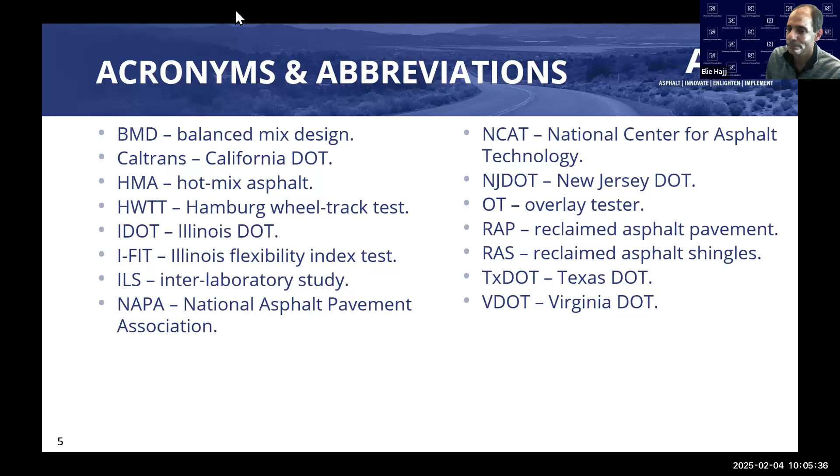Obviously, there will be some acronyms throughout the presentations, and we have them here. The main ones are listed over here for your reference. Sometimes it may be hard to keep up with the acronyms, so I'll stop just for a few seconds here to give you a chance to go through them. Thank you. If we can move on to the next one.

And then the expected outcomes for today's webinar. So we're going to be talking about the implementation plan for balanced mix design. So it is critical to recognize how important it is to adopt and develop an implementation plan, as well as identifying the key tasks that need to be completed prior to creating that initial implementation plan.

Hopefully, by the end of this presentation, you'll be able to understand how your available resources, whether you belong to agencies or contractors, can influence the scope of the implementation plan. Also identify how key stakeholders can assist in the development of the implementation plan. And finally, hopefully you'll get to learn about some of the effective practices from the lead states related to the BMD implementation plan. With that, I will pass it on to Tim Aschenbrener to get us going on the presentation.

Well, thank you, Elie. I'm going to start off and go over a little bit of the background. Derek is going to follow up and go over some actions prior to creating a plan. Then I'll pick up on implementation planning and provide examples from 3 state DOTs. And then Derek will wrap up with effective practices and lessons learned.

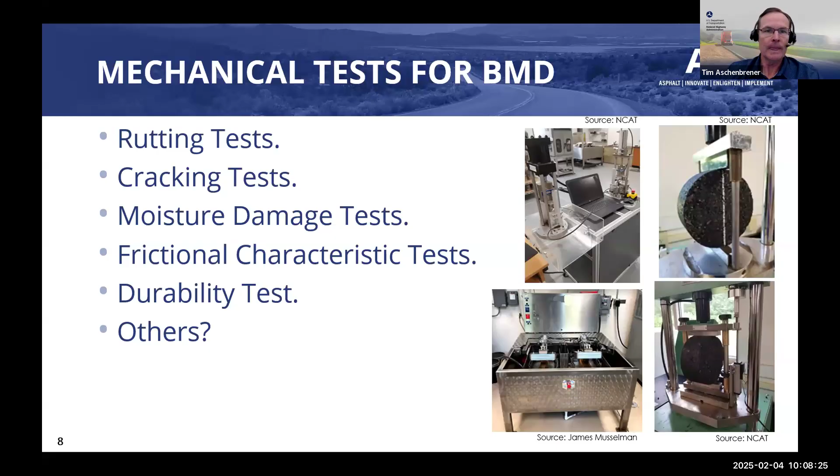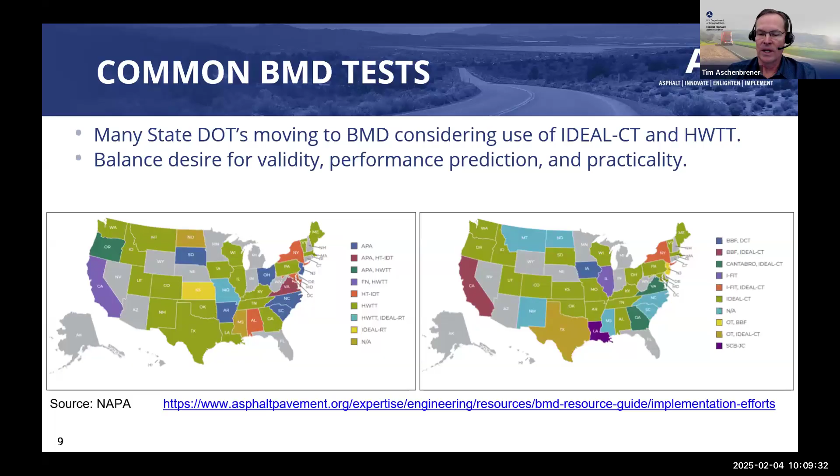But the most common rutting test, the map there on the left, seems to be at this time the Hamburg wheel track test. There's about 22 states that are leaning in that direction. Not only does it do rutting, but it also gives an indication of moisture susceptibility as well. And then the map on the right shows the direction states are leaning towards in terms of cracking test. Right now it seems the IDEAL-CT is the most popular. There's about 23 states looking at the IDEAL-CT.

Now you'll see there are some approaches here that states have selected. And the one comment I would make there is you don't just want to get locked into one approach. You don't want to find your favorite parking lot and park there and stay there forever. You certainly want to advance, but of course advancing relies on confidence in the test. And to get that confidence that the test results match your field performance really relies on validation. And I bring that up because validation will be the topic of our next webinar series next month.

And as we go through this information, we've gathered information from a variety of sources. Most notably, we looked at case studies from seven lead states back in 2020. We virtually visited these seven states. We looked at the information and specs in advance, and then we spent two to four days with each state to understand all the details of where they were at. Now, that was a little while ago, but we have kept things current. We've stayed in touch with these states to make sure we have the latest information.

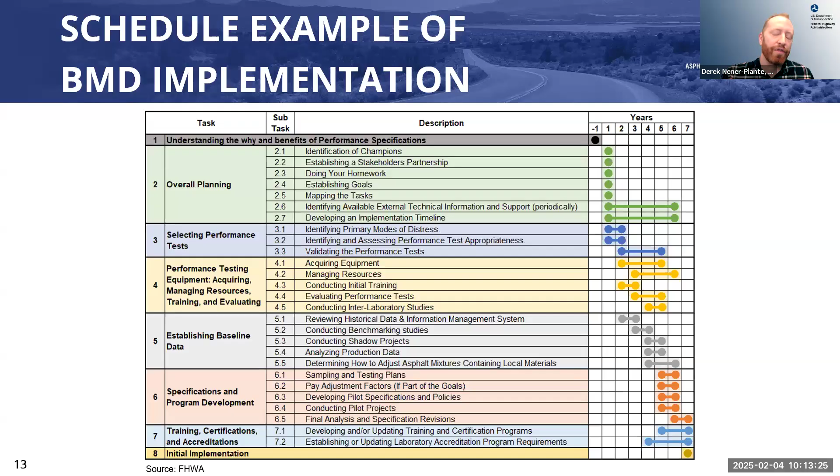So for this particular webinar, we're talking about what is typically put in task 2, overall planning. Makes sense, right? So what I want to cover is some of the things before you can even get to the plan. What are some of those things you need to consider even before you get there?

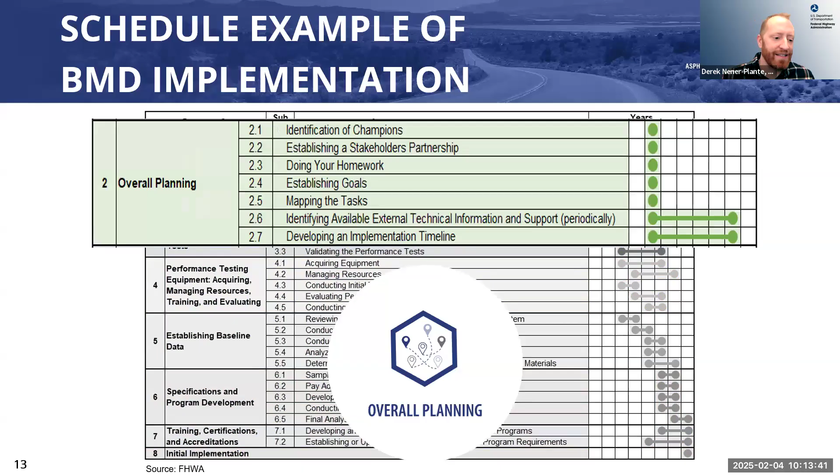And so a big one that can't be underestimated is understanding, why are you changing? Why are you looking at balanced mix design in the first place? Why are you going to expend resources? And this is great advice that's been taught time and time again, that change can be painful, change requires effort, and you need to know why if you really want it to succeed. So why change? Why do balanced mix design?

So I think the obvious thing that we often hear is that many believe, number one, mixes behave differently, that within your state, within your agency, within your area, you have certain classifications of mixture. And whatever they are, class 1, class A, they all behave a little bit differently, right? Even though the specification says they're equivalent products.

Many also acknowledge that the current design procedures may not optimize performance. In general, the pendulum shifted: we went away from previous mix design ideologies, we went to Superpave. We got rid of rutting, we had cracking and more cracking, and volumetrics alone is not optimizing our mixtures. So number one, improving performance has got to be in there as a why.

I'll give a couple examples of seeing the evidence of improved performance with balanced mix design and the potential for the future. Because as those working in the pavement world, we all know that if all of a sudden, from this year to next year, every treatment we do gets one more year, it doesn't sound like a lot, but it makes massive impacts to our transportation network. Even though that doesn't sound like a huge impact, it is. I'll show some evidence of that in a moment.

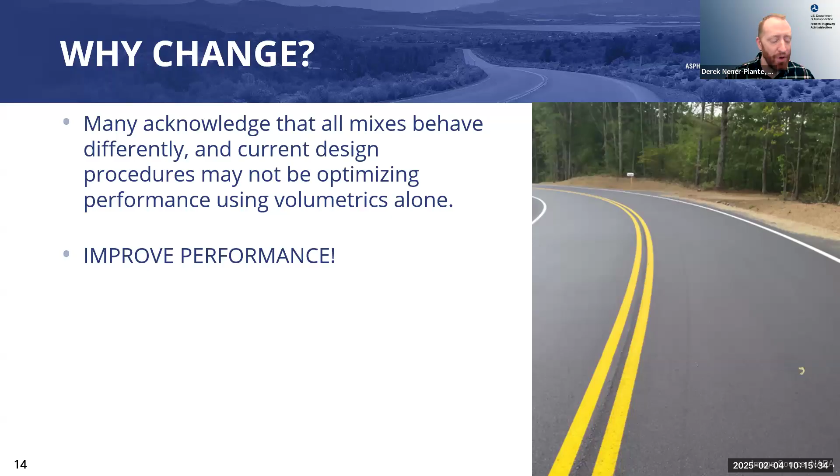RAP was certainly around, but not pushed to where we use it now, with increased percentages or the use of fractionation. Modified binders, again, not to the degree that we have today with a number of modifiers, the highly modified materials, etc. Those binders weren't around when Superpave was first developed. Fibers, additives, warm mix, the list goes on. There's a lot of new technologies that were not necessarily incorporated into our volumetric or Superpave analysis. So they're not necessarily handled well in that system, and we need something that can account for their impact on performance of the mixture.

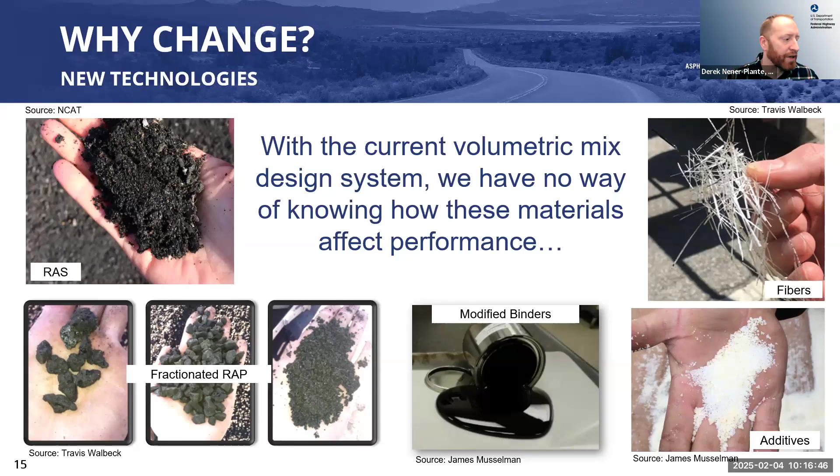So what about all the other benefits, right? Certainly we want better performance. We want ways to incentivize better performing asphalt mixtures. Well, what else? A big one for many states is optimized use of recycled materials. We know that recycled materials can lead to more economic mixes. There can be savings there, as it uses asphalt that's already in those recycled materials, or aggregate, et cetera, to help keep costs down, and also reduce impacts in other places like emissions.

But the idea being that a lot believe, and a lot of the work has shown, that Superpave may be okay at a certain RAP content or recycled material usage, but beyond that, it starts to struggle. And it's in that struggling area that maybe balanced mix design can come in. So allowing more recycled material usage is one potential benefit that many agencies and contractors as well are looking at.

That goes into also local materials, utilization of more local materials. We know that resources are finite in a lot of places, be it aggregate, binder, etc. So if we can promote the use of local resources, maybe aggregate sources that are closer to the project, closer to your area, that may not only help on the economic side of things, but also in impact to the environment.

All those things kind of put in together. It can also perhaps handle innovative materials. I know agencies a lot of times are approached by a new product, a new additive, a new way to put in asphalt mixtures, whatever it is. Today we talk a lot about recycling agents, warm mix asphalt, new binders, bio binders, etc., modifiers.

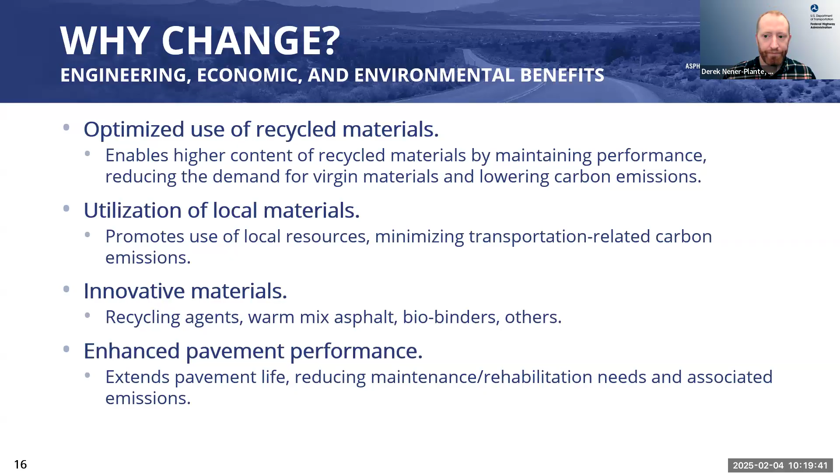So these are their mixtures that they use on some of their highest traffic locations, or in other cases, high RAP mixtures. And the backbone of those specifications are mechanical mixture performance tests, balanced mix design. Some of their specifications even go to the point of not necessarily specifying binder grade, and just saying meet these 3 tests for durability, for rutting resistance, etc. And they say in these cases, in some of the roadways with the highest traffic in the nation, they've seen significant life extension. There's a big difference on a major expressway near New York City between getting 5 years and getting 10 years.

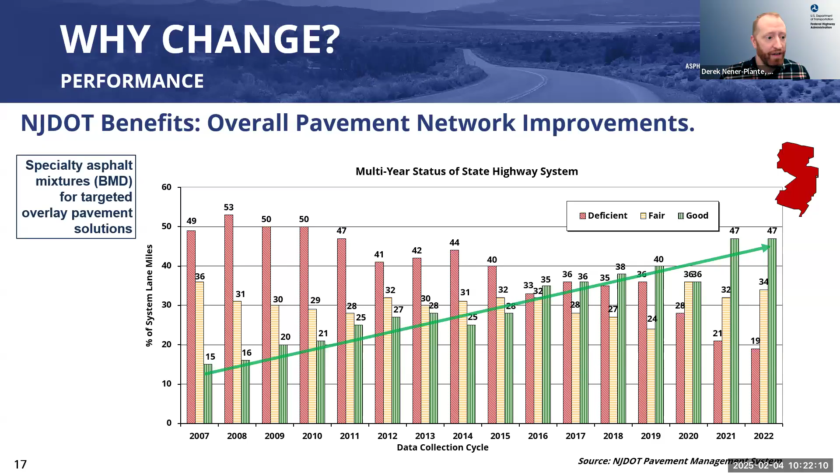Another example on why change is an excellent one from the National Center for Asphalt Technology, NCAT, and their test track, where they do traffic loading on sections over the course of 2 to 3 years. This is an example from Texas mixes using and not using balanced mix design. There's a lot of research that goes into this, but essentially they have similar mixtures: one that was volumetric and 2 that were designed with balanced mix design. These still had to meet volumetric requirements, but they adjusted the mix a little beyond what their typical specification would allow, and got to the sweet zone of an overlay test and a Hamburg wheel tracker.

The other 2 BMD mixes: one has been out there for the same amount of time. It has less than half of the cracking that the other section has, and has kind of plateaued a little bit. Another one is in a newer cycle, the newer N6. But N6 has no cracking after 9 or 10 million ESALs so far.

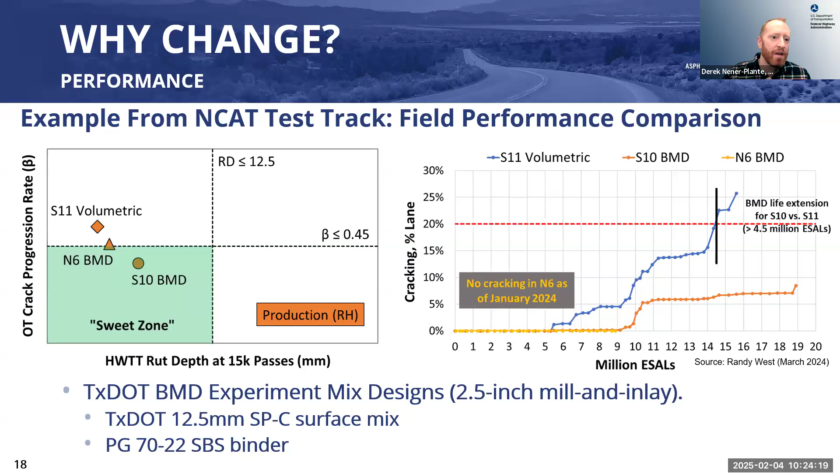So if you extend this out, NCAT has done analysis, and I implore you to look at those resources to see that specific analysis. But this has huge life cycle benefits from the life extension that you're getting. And this is the proof in the pudding. This is showing that by taking a purely volumetric design and designing more with balanced mix design in mind, you can make significant performance improvements. And imagine that throughout your system.

So we highlight the why here and try to hit on it hard because we have had experience in certain areas that maybe haven't coalesced what their why is. Understood, improved performance is probably the same for everybody, but there are very specific ways that we've talked to different agencies, different areas, and their why is slightly different.

And in order to get to a good plan to move forward to implementation, it's important to know your why. Why are you going to do this? How are you going to justify this to people that ask why you are doing this? So that's a really important thing that you have to do in order to even get to the planning that Tim is going to talk about.

Other important things to consider before you start crafting a plan is identifying your resources. And a big thing, I see we had a lot of people signed in from agencies, is the identification of champions, on the state DOT and the industry side. Have somebody that's going to fight for balanced mix design implementation within the area that they work. It's important to have these champions, and we could throw this slide up for nearly anything, not just balanced mix design.

But if you have something where there's no one really as a point person, it can lose some of that drive, someone who's going to continue to push it forward. So it's important to have that champion, not only at the agency or state DOT, but also somebody within industry who's going to help corral things on that end and get industry involved, as we'll talk about with creating the plan.

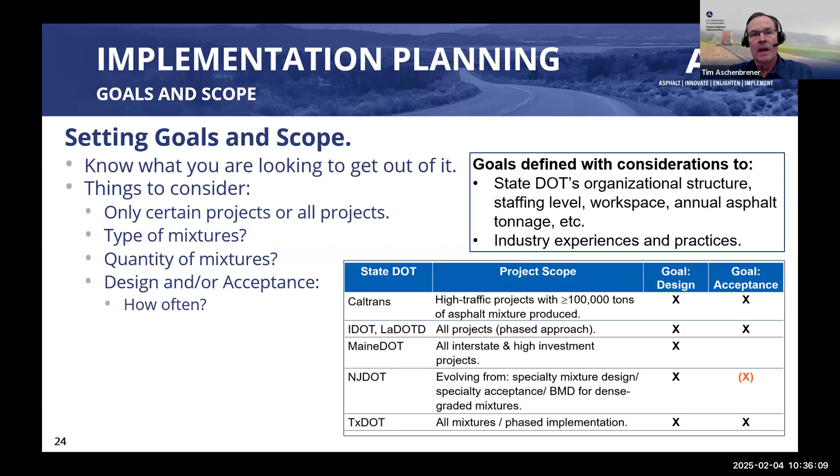The other thing I want to point out in terms of the goals and scope that could make things complex is how the mechanical mixture performance tests, how those balanced mix design performance tests relate to mix design and acceptance. Now, in mix design, more often than not, the contractor has the responsibility of developing that mix design, oftentimes in the lab, but not always. And then the agency has to approve the job mix formula.

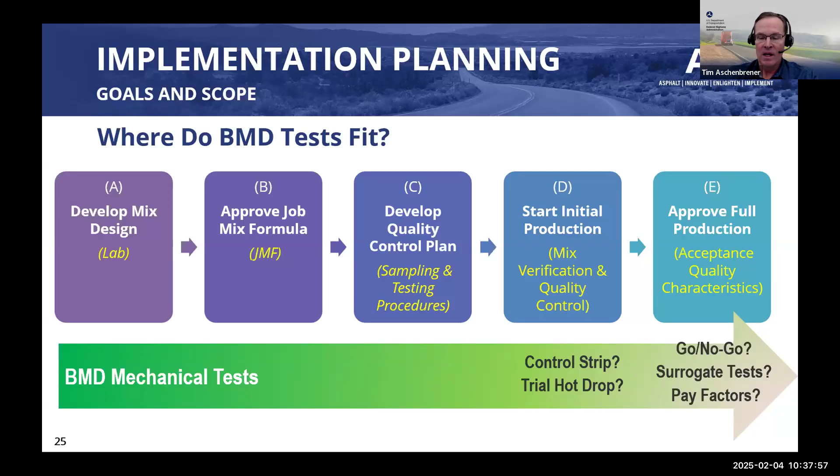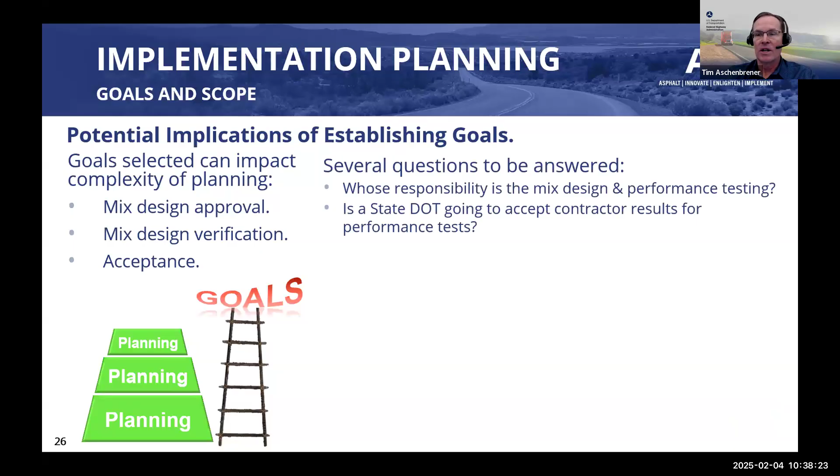Whose responsibility is the mix design and that performance testing? Is the state going to accept contractor results for performance tests? And if so, that's going to enter into a whole new realm of requirements, including verification and validation. How's the state going to verify and accept mix designs from the lab mix samples, from plant mixed at the initial start? How do you plan for additional workload, costs, and time involved?

Regardless of how you answer any of those questions, there is going to be some additional time. The central lab usually handles a lot of that, but also the district or region lab can certainly get involved at various points, either in the mix design or production. And how's production testing going to be handled and at what frequency? Of course, not all tests pass. From time to time, there will be a failing test. How are those handled? And then that leads us to dispute resolution and even the skilled workforce that's necessary.

Sometimes people are used to running those asphalt content and gradation tests, and all of a sudden, these tests are much more complicated, even than the typical volumetric tests. So these things are good to have a handle on. A final decision doesn't have to be made, but the time and complexity it takes to go through your implementation plan is going to impact a lot of these discussions.

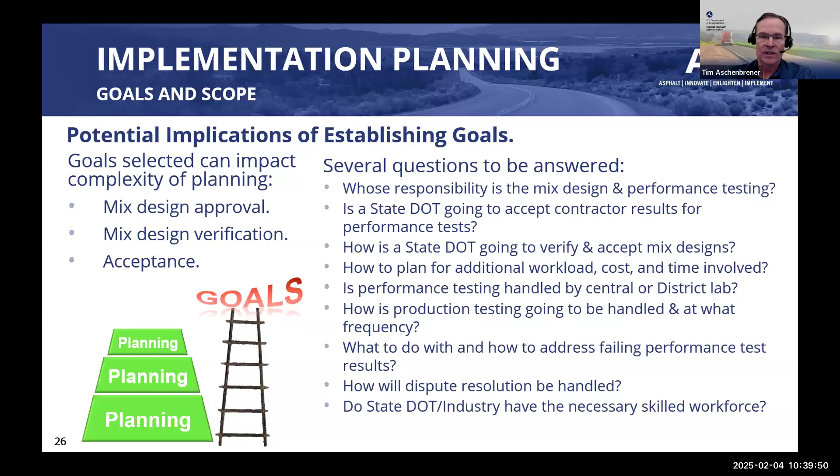And these discussions are great to have with stakeholders and task forces. The questions are a lot of critical issues. What's the state's perspective? What's the industry perspective? Well, having a strong champion to lead through those discussions in order to come up with some initial direction to set a plan is important. A couple examples here. One is from Illinois DOT. They had an implementation task force. It was a joint task force between agency, industry, and also academia.

Virginia DOT, they had two task forces. So they had a technical subcommittee. So all those technical issues, how do you handle recycling agents? What do we do for long-term aging? The technical subcommittee handled all of those type issues, while a higher level BMD task force looked more at management issues. Well, we might need some more equipment. How much equipment, how much funding do we have to find? What about workforce and training? The management type questions were handled by a higher level task force.

So then when some of these initial questions are answered, mapping the tasks is a great place to proceed. You have a lot of issues on the table, and with the agency, contractors, and other stakeholders, how are you going to address those issues? Sometimes you might want to write a research problem statement specifically to an issue, and then academia can take charge and provide an answer. Sometimes other states have encountered that situation, and you can rely on what other states did to a certain point to see how it could be implemented within your area.

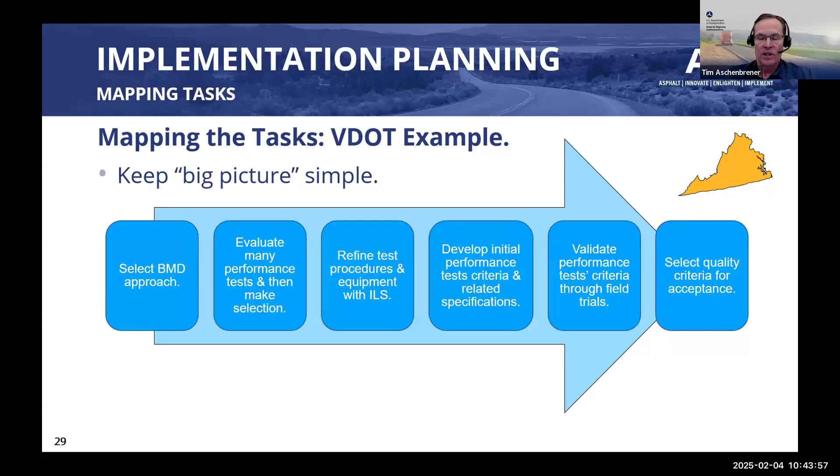But they knew to tie that criteria down, they needed to do validation. And so validation occurred throughout the states to really set that criteria that they could put in a specification. And through validation, they picked the actual criteria and wrote their acceptance. So that's a good way to develop a big picture mapping.

And then they put timelines on that. And the timelines were to develop the lab testing specifications, purchase lab equipment. They're going to build some pilot projects. They had a few research projects in mind they needed to get completed. And then they would head towards statewide implementation.

Now, we visited Virginia in 2020, and at that time, they showed us this plan, and they told us it was a very aggressive plan. And quite honestly, with what they told me in terms of what they had done and where they were headed, I thought it was an overly aggressive plan. I thought, oh my gosh, I wish them the best, but I'm just not sure that they're going to have enough time in there.

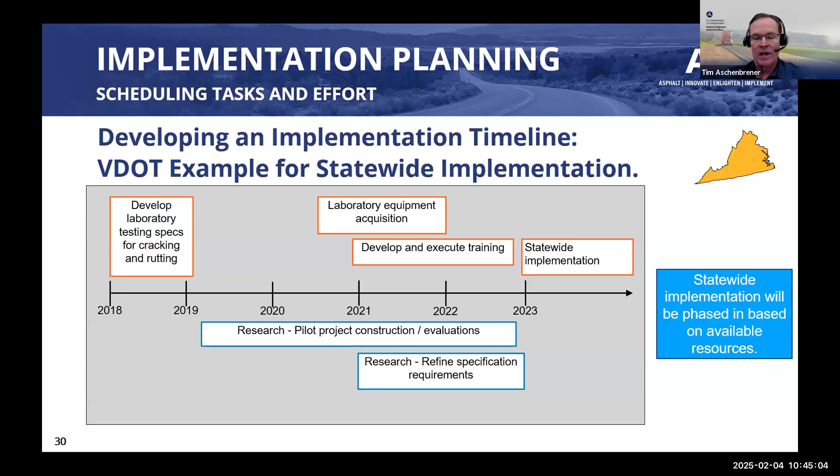Now, keeping in mind that from the beginning, they wanted to phase in implementation. They were not just going to go to statewide implementation on all the mix throughout the state. They were going to have some kind of phasing. Well, I think this plan really is a strong or powerful indicator of planning with timelines and how it can be a powerful motivator. So let's take a look at what actually happened.

So as they got going, they advanced from 10 projects to 13 projects to 15 projects. They advanced from 72,000 tons per year to over 300,000 tons per year. They started with 5 districts being involved to 9 districts being involved. And then last year, they focused on their phased implementation with their non-polymer dense graded surface mix.

And for their approach A, which was the performance tests and mix design only, was about 700,000 tons. And for their approach D, which was for using performance tests for mix design and acceptance, they were about 1.5 million tons. So by having this plan in 5 years, essentially, they had reached implementation of a significant part of their program.

It really shows the power of having a plan and setting target dates. In fact, when we met with our lead states, one of the feedbacks they gave us is you have to have a plan if you're going to advance, and it's best to write that plan down.

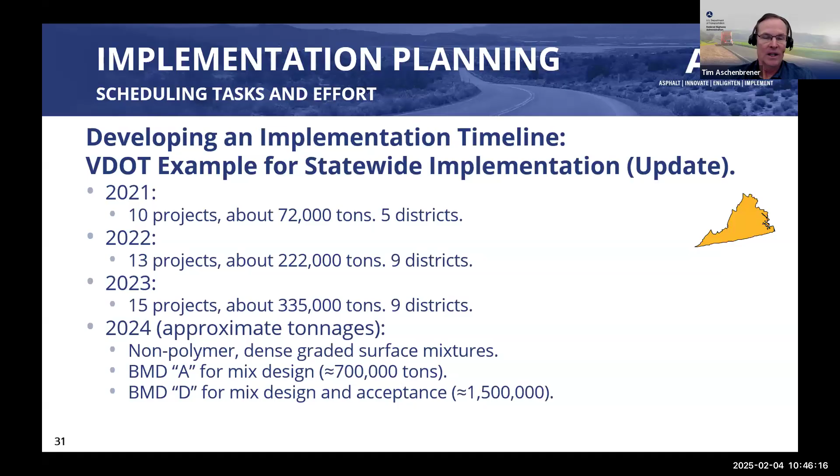So the second example I'll go over is from Illinois. In Illinois, their initial plan, I'll highlight, is about 5 years. As that shows that it does take significant effort over a long period of time, keeping in mind they had already implemented the Hamburg wheel track test. So this was just to implement the cracking test. They're just trying to implement cracking only. Initially, this is what they thought.

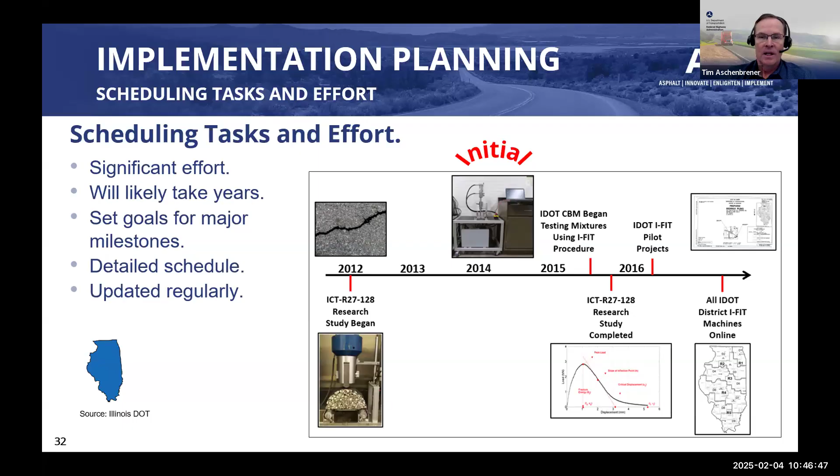So we'll take a look once they got full implementation. This is where they finally ended up. It was about 10 years. Now, keeping in mind, they started very early in the process. There were not very many standard test procedures for cracking, so they had to develop their own cracking test. I think now as you get going, people would say there's more than enough test procedures for cracking.

The other thing was long-term aging. They knew that was important, and there was really no standard procedure or standard practice for long-term aging. They had to develop their own, but now I think you would say there's more than ample long-term aging practices out there. But they had to start early on from scratch, and it took about 10 years to get to acceptance.

Now, when we met with the lead states, one of the feedbacks they gave us was to keep these plans updated. The plan you start with is not the plan you're going to end up with. Keep it updated, especially by documenting decisions, because by the time you get to implementation, over that much time, key people may retire, key people may switch jobs. And at this point in time, they want to go back and identify some tweaks here or some adjustments there. And it's going to be very important for them to have that background information to do things effectively.

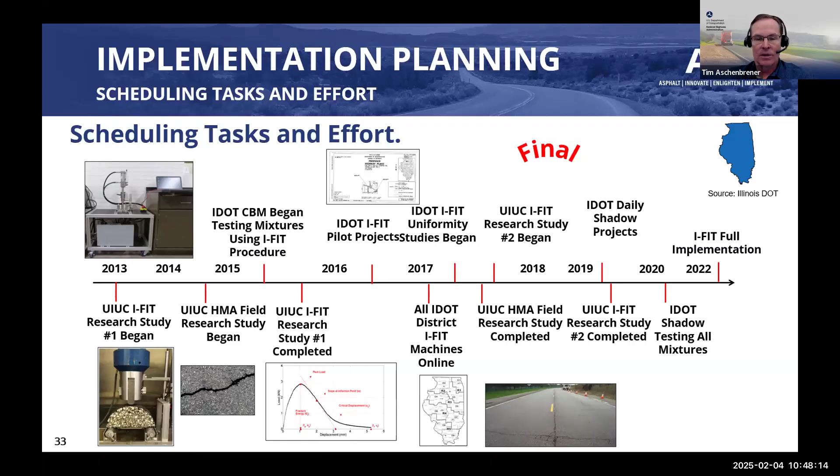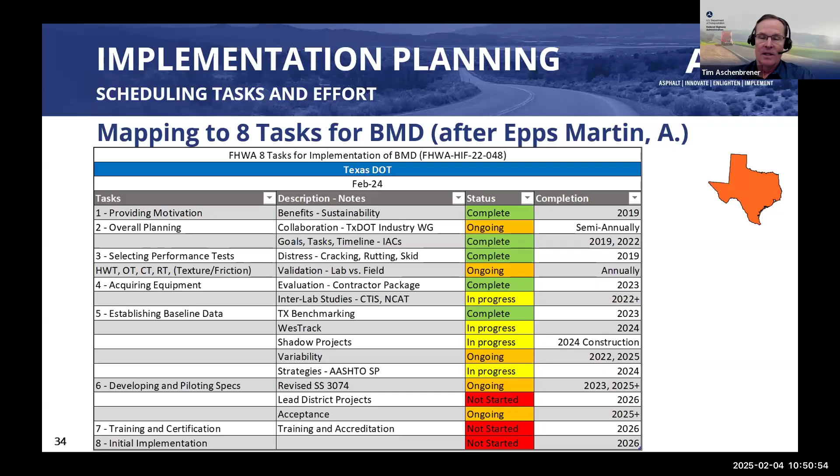And I can say one project I'm working on, the team has a rocket scientist doing the project scheduling, and it makes the effort of tracking all the tasks a lot easier on my side. So take advantage of those skill sets. So implementation planning and examples. And with that, I'm going to turn it back to Derek for effective practices and lessons learned.

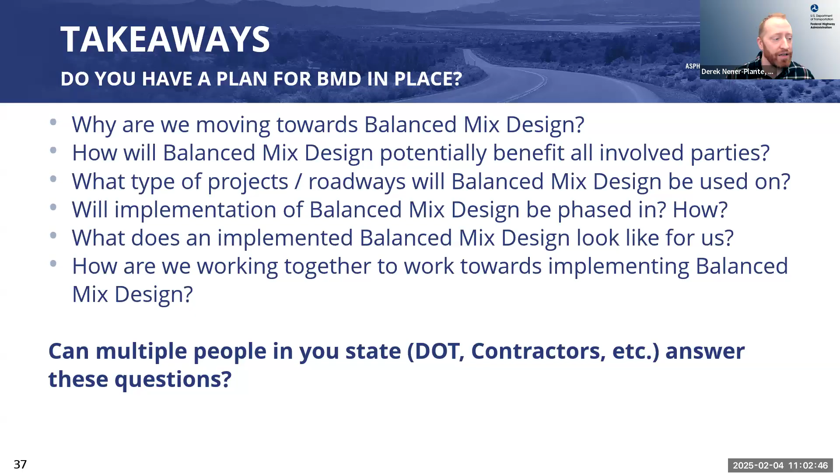And again, I think the message from the lead states and others is that this will save you time. Any sort of planning and keeping it up to date over time will save you time and resources as you go through anything like this, balanced mix design or anything else that is significant and is going to take a significant amount of time to put into place. So with that, that's our topic on planning.